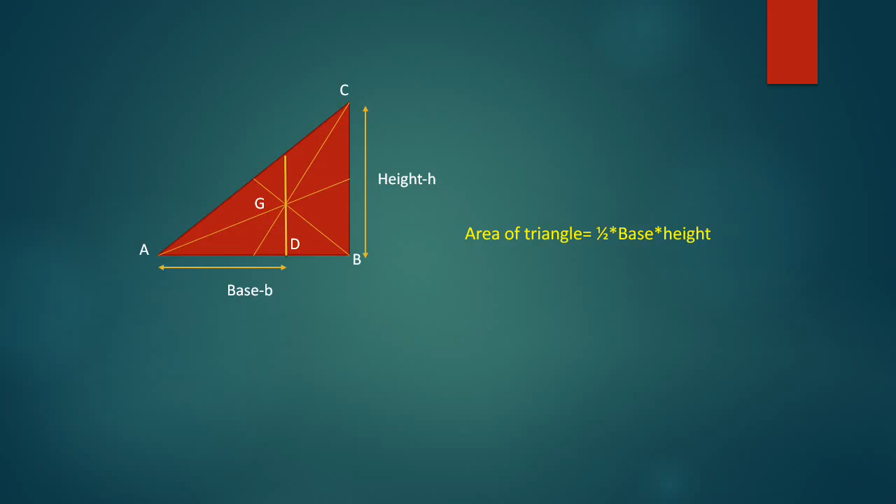Okay, and if we draw a line through the centroid, straight line perpendicular to the AB, then it divides the base into ratio 2:1. Yes, this is the property. The perpendicular line through the centroid of the triangle divides the base into the ratio 2:1.

So here the ratio becomes AD is to DB equal to 2:1. So AD will be equal to 2/3 into AB. And DB will be equal to 1/3 into AB. Now we have to clearly remember these two properties of the triangle because in uniformly varying load we'll be using the two properties itself to get the concentrated load out of the uniformly varying load.

Okay, so I will repeat once again that the straight line from G to D which is perpendicular divides the base AB into 2:1 ratio. Okay, so AD becomes 2/3 into AB and DB becomes 1/3 into AB because AD is to DB equal to 2:1.

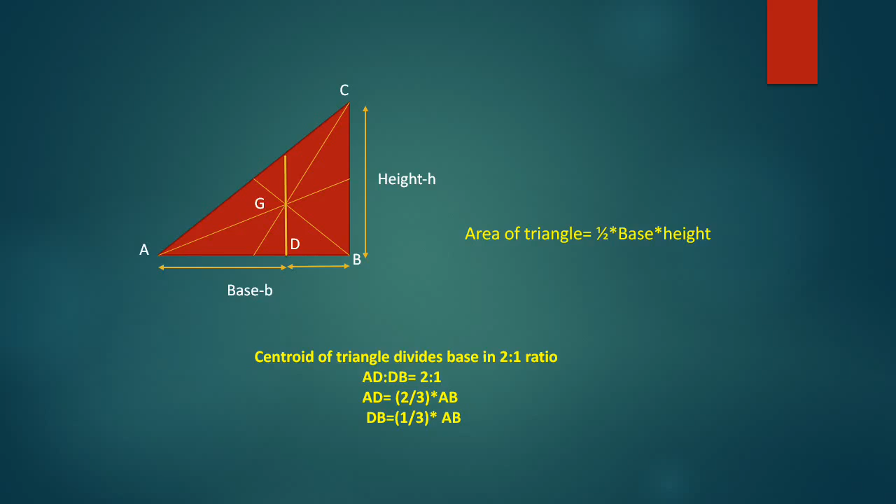Okay, now we see the question once again. There was 2 kilonewton per meter, 3 meter span, two reactions RAX and RAY and RBY. RAX and RAY because the hinge support is there, so one horizontal reaction and one vertical reaction, and RBY because only one reaction and that is due to the roller support.

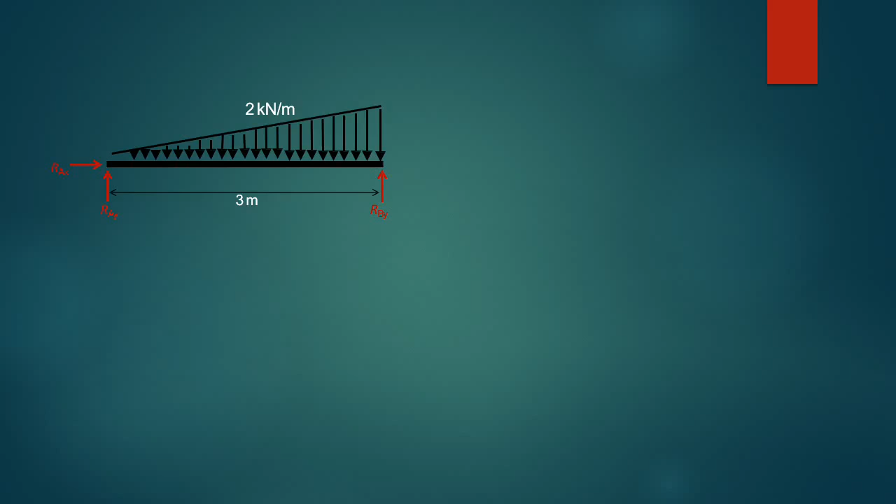So this big load we see here, the whole concentrated load instead of the uniformly varying load will be 3 kilonewton. Okay, and at what distance it will act? It will act at a distance of 2 by 3 into 3 meter, that is 2 meter. Okay, the whole span is 3 meters, that is the base is 3 meter.

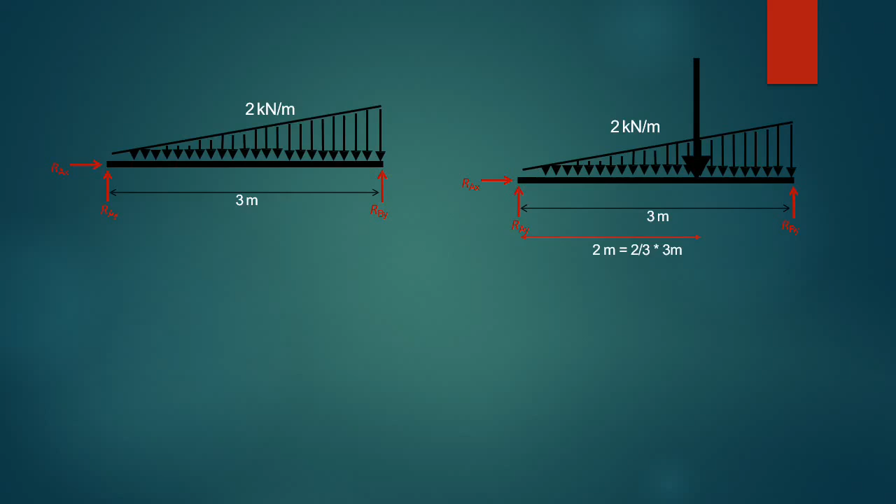So 2 by 3 of base, because we are taking that distance from the A end; if we did it from the B end it will be 1 meter. Okay, so we'll now use the equation, equilibrium equation, the first one, MA equal to 0. Now with MA equal to 0 we get 2 kilonewton per meter into 1 by 2 into 3 meter. This is the magnitude of this big load. Okay, we are taking moment about A.

2 kilonewton per meter into 3 meter. This is 3 meter by 2, this is the base 3 meter, this is the height 2 kilonewton per meter. 1 by 2 into base into height, that is the magnitude. So this part, 3 by 2 into 2, gives the area or the magnitude of the concentrated load.

Okay, now the second part, which is how much distance this load has. This is 2 by 3 into 3 meter. 3 meter is this whole length, so 2 by 3 into 3.

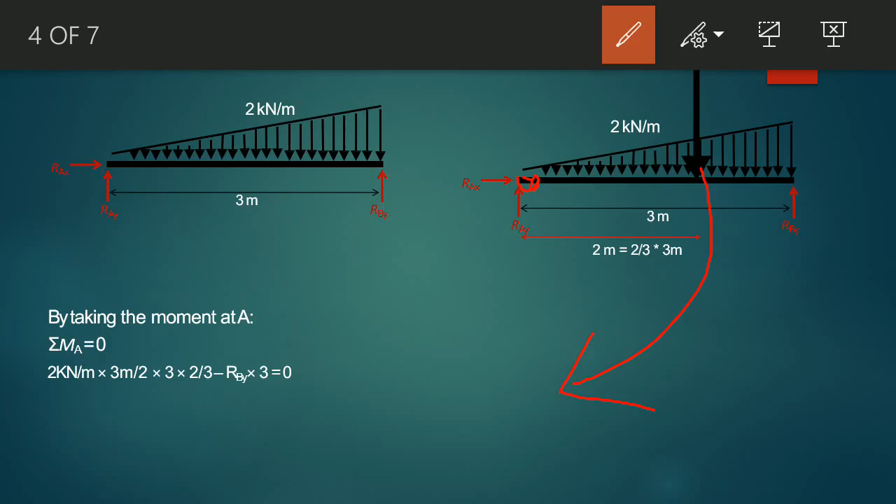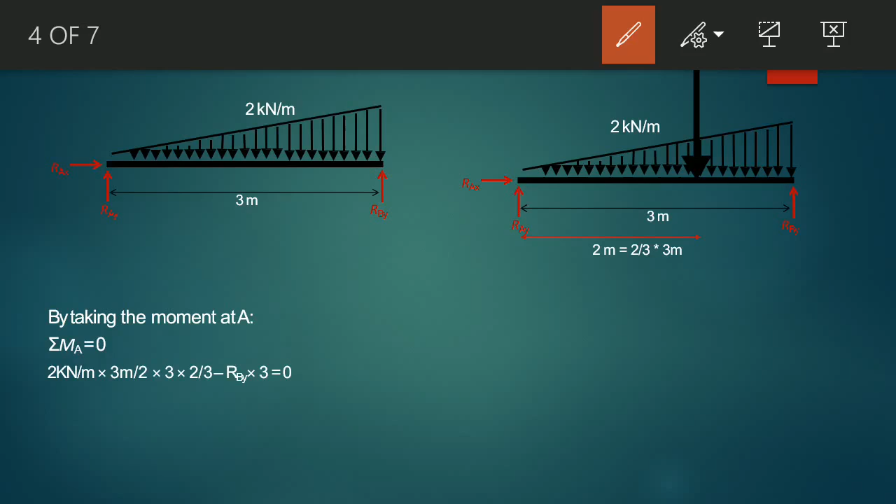So we get another moment due to this about point A. But point A is in this direction, which is clockwise, so it has to be positive, and the moment about A of RBY is anti-clockwise, so negative, and the distance from RBY is 3 meter. So we get this, we get the answer as RBY equal to 2 kilonewton. Okay, so we got our RBY.

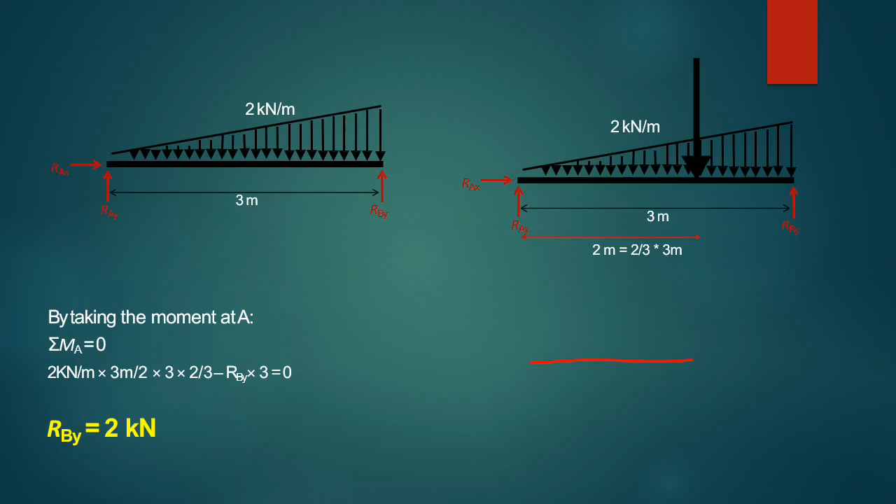Now we use the second equation of equilibrium, which says Fy equal to 0. Now Fy equal to 0 will get what? There are two reactions, RAY and RBY, and one load whose magnitude as we know is 1 by 2 into base into height. Height is 2 kilonewton per meter and base is 3 meter. 1 by 2 is the formula, 1 by 2 into base into height. So we get RAY equal to 3 minus 2, because RBY we have found out 2 kilonewton. So we get RAY as 1 kilonewton.

Okay, and the third equilibrium equation says what? Fx equal to 0. So there is no other force in the x direction except Rax, so Rax will be 0. Okay, we got the three answers.

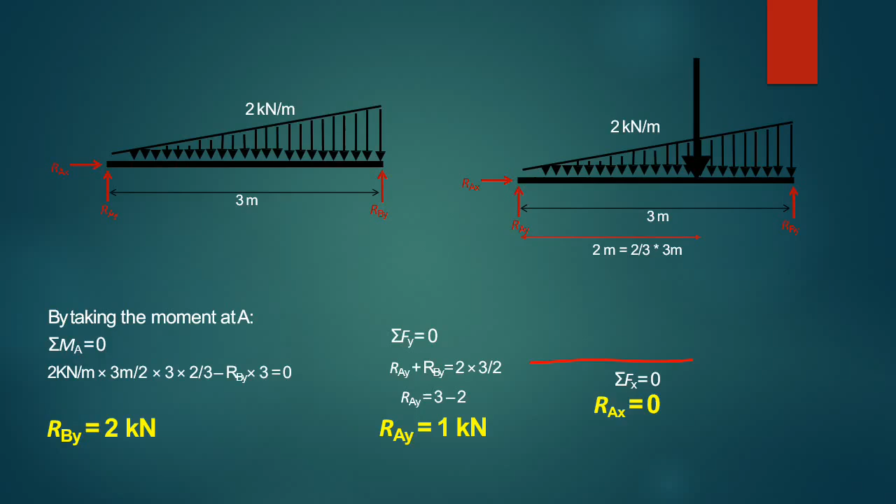So this is how we solve it. We have to convert the triangular load into a single concentrated load with the help of the formula 1 by 2 into base into height, because it's a triangular load. So we get by that, and the centroid formula 2:1. Okay, I hope you get it.

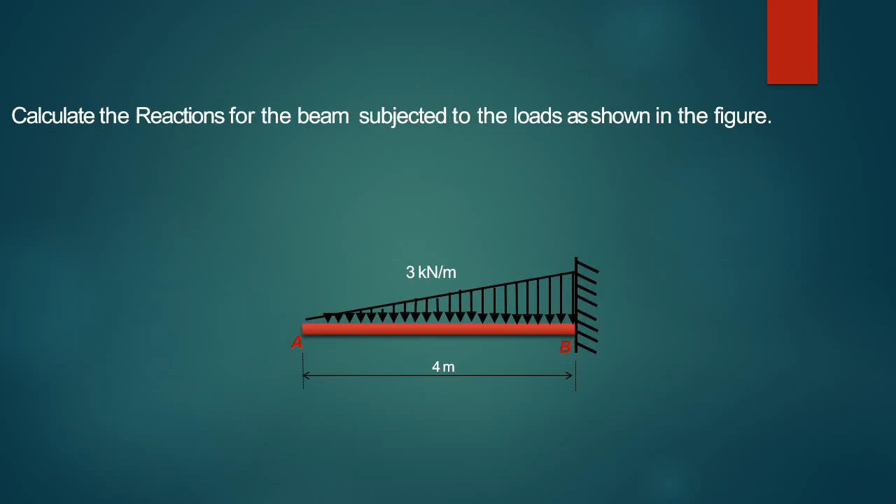Okay, we'll solve one more then. Now calculate the reactions for the beam subjected to the load as shown in the figure. Earlier we saw there was hinge support, there was roller support, but this is different beam. This is a cantilever beam. So what happens in a cantilever beam?

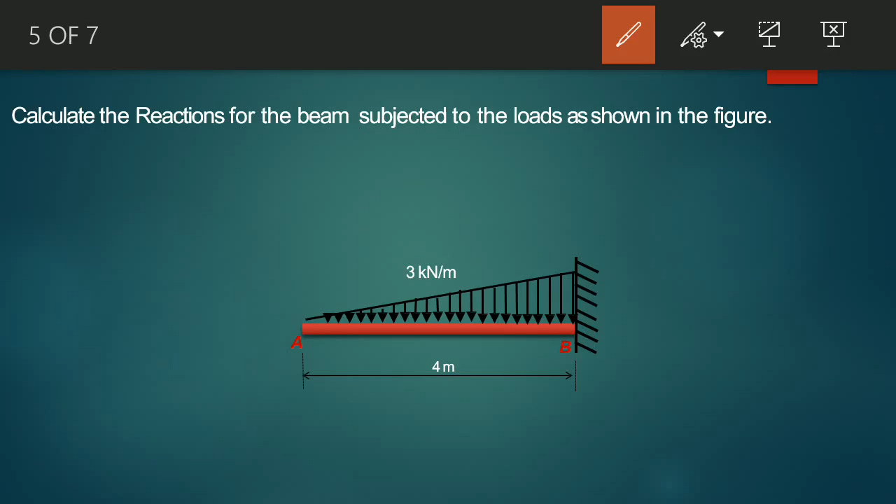The free body diagram will be different in this way such that because this is fixed about this point at point B, all the loads that are acting on the beam are trying to move it in this direction, but the reaction has to oppose this, so the reaction will act in this direction. Okay, this we'll see in the free body diagram.

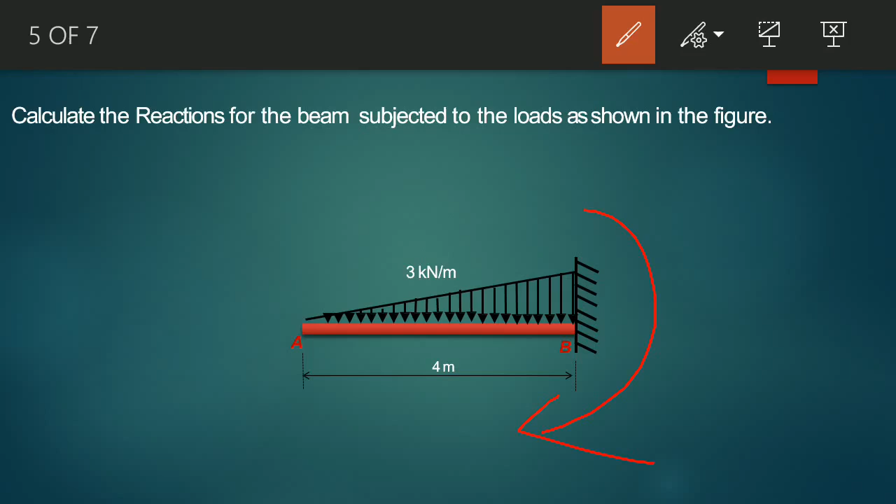So as you can see in the free body diagram, the reaction is acting in this direction. Okay, and one vertical reaction RBY, this happens in the cantilever beam. So one moment and one vertical reaction.

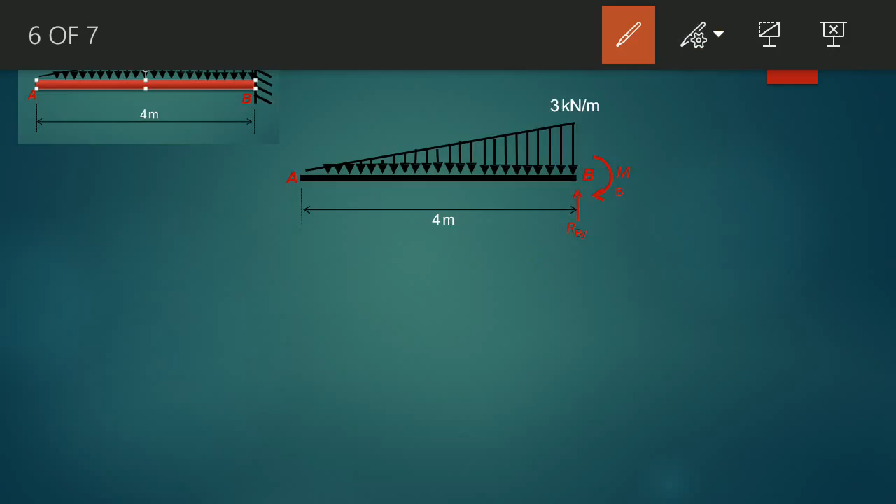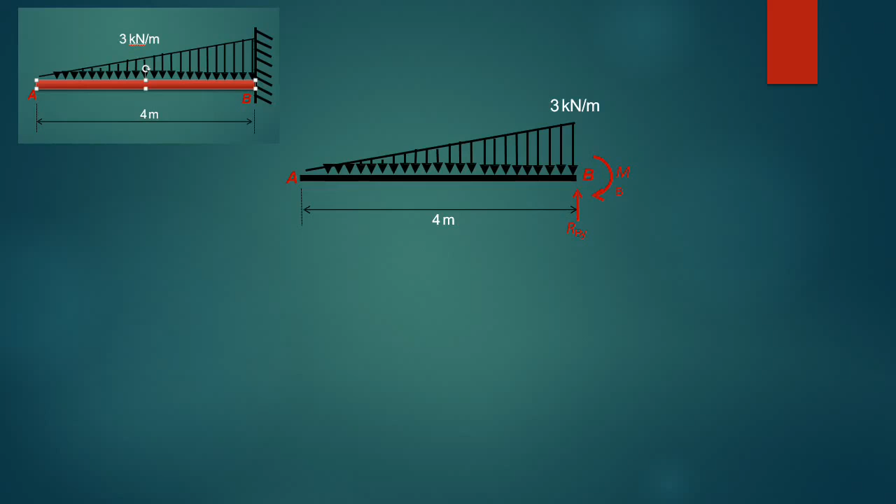Okay, now let's see, we'll take now the moment about point B. We have, for the previous triangular load, we used the moment about point A. Now in this question we'll use the triangular load. For this triangular load we'll use the moment about point B. So equilibrium equation about point B, we get MB equal to 0.

Moment about point B equal to 0, what we get, this is the moment, so we'll write as it is. We are taking moment about point B, but moment due to RBY will be 0 because the distance from B to RBY is 0. But the moment at point B will not be 0 because at that point no distance is multiplied.

So moment at point B will be there, which is clockwise, so clockwise moment MB plus the moment due to single concentrated load of the triangular load. Okay, so what we have to do for that, we have to convert it into the formula, which is 1 by 2 into base into height.

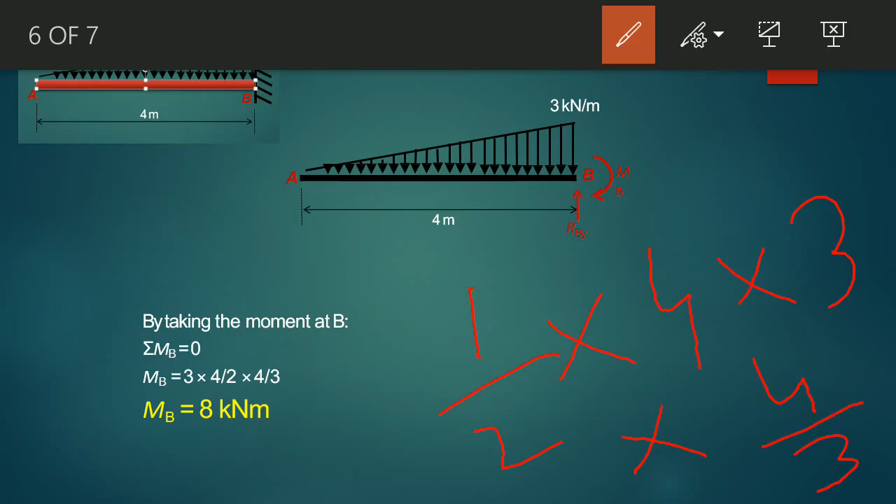Okay, this is the magnitude, and from B the distance will be. Remember the centroid formula, we divide it in 2:1 ratio here. So here the distance from point B will be 4/3. Okay, that's what we are getting. 4/2 into 3 into 4/3, we get the answer as 8 kilonewton meter.

So now we'll apply the second equilibrium equation, which says Fx equal to 0. Now Fx equal to 0, as there is no horizontal reaction acting, so Rbx will be 0.

And third one, Fy equal to 0, so Rby equal to 3 into 4/2, that is 1/2 into 4 meter is the base and 3 kilonewton per meter is the height. So we get easily Rby equal to 6 kilonewton. Okay, there are only two forces, one upward and one downward, so they both equate each other and we get the answer. So this is the way to solve it, solve the uniformly varying loads.

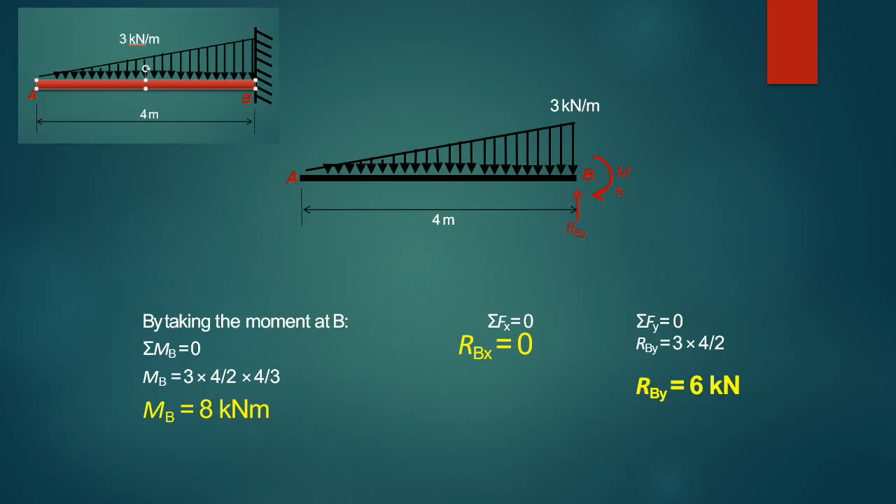Now this will help us in solving the numericals, finding reactions in trusses also. So do remember this method and keep practicing.